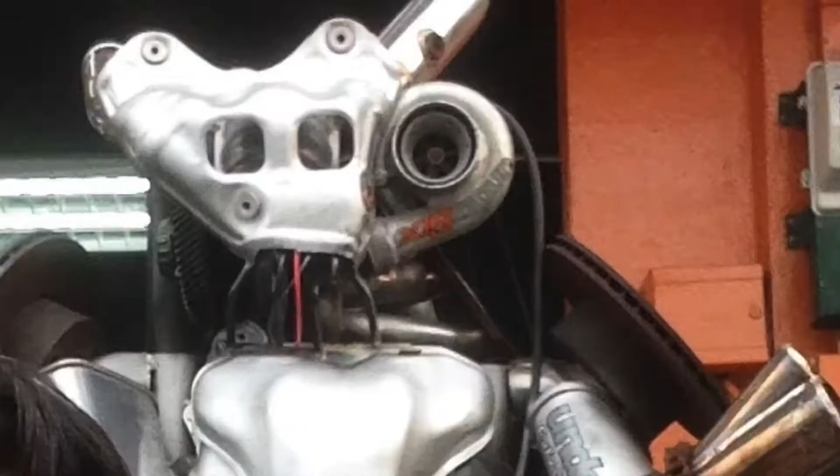I'm Yok Joe. In this video, I'm going to unbox the Lerdge X 3D printer controller board. This board is a closed source system pre-programmed by the manufacturer and suitable for individuals like me who know nothing about programming.

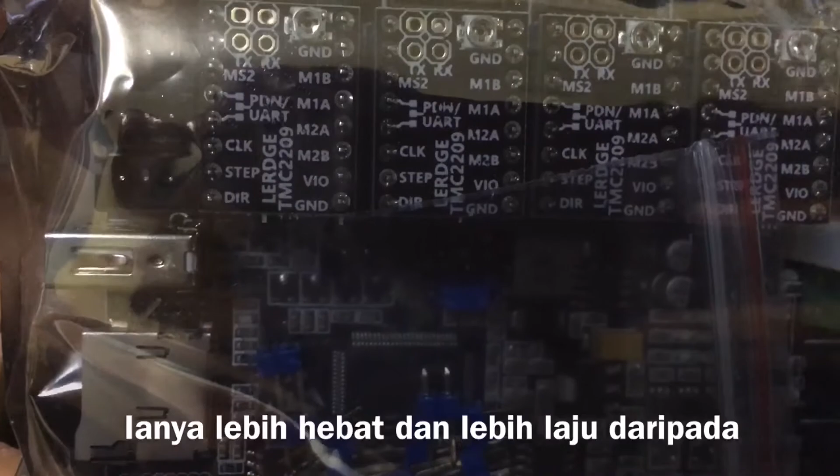This board is equipped with STM32, a 32-bit microprocessor. It is far more superior and faster than the previous Atmega 1284 controller board, which only has 8-bit microprocessor speed.

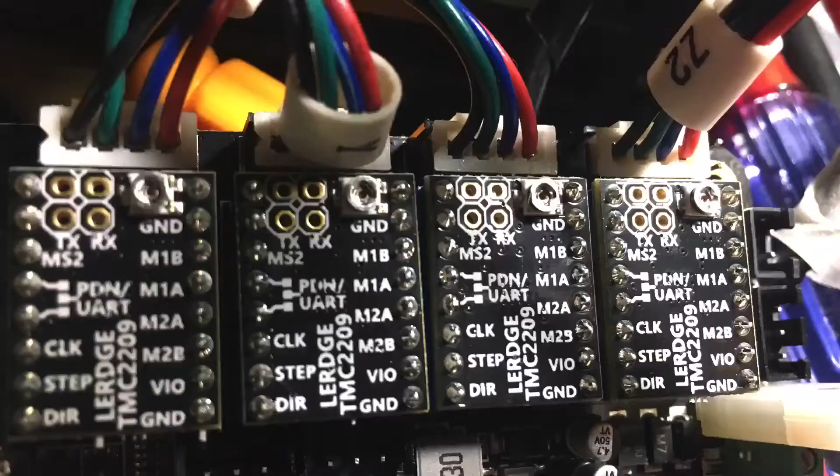This Lerdge X came bundled with a TMC2209 stepper motor driver for quiet printing. This board is for single extrusion.

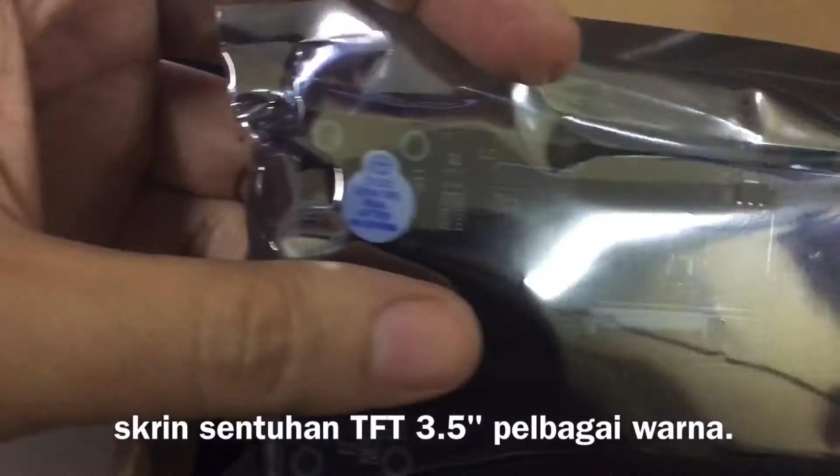This controller board came standard with a 3.5 inch TFT multicolor touchscreen. This screen also came with a manual control rotary knob.

Four pieces of anodized aluminum heatsink to be placed at the TMC2209 stepper motor driver.

This black and red wire is to be connected between the board and the 12-volt power supply.

This board came with a stylus pen for easy access to control the touchscreen.

This is the end of the part where I introduced the Lerdge X. Now, for the next part, I'm going to install this board to the Tronxy X5.

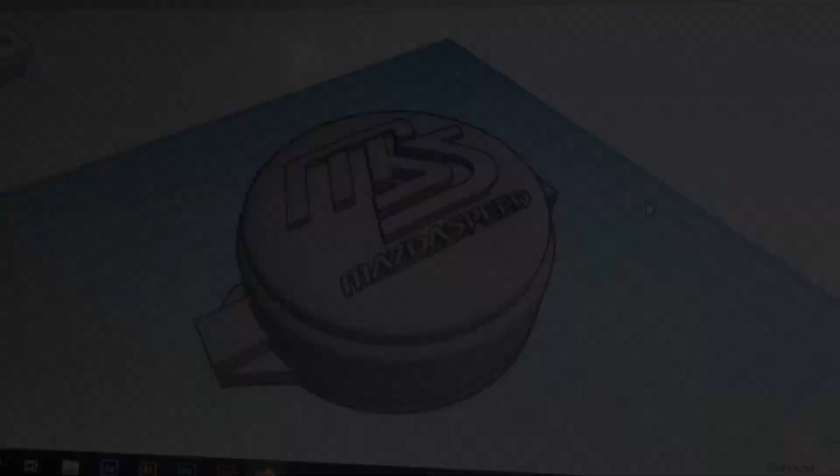3D printing is not as easy as a click of a button. I've made a few interesting designs, but this printer just won't print using the previous motherboard. I found out that the stepper motor driver had already fried. It is much better for me to purchase the very latest version of a 3D printer motherboard than to repair the very old version motherboard.

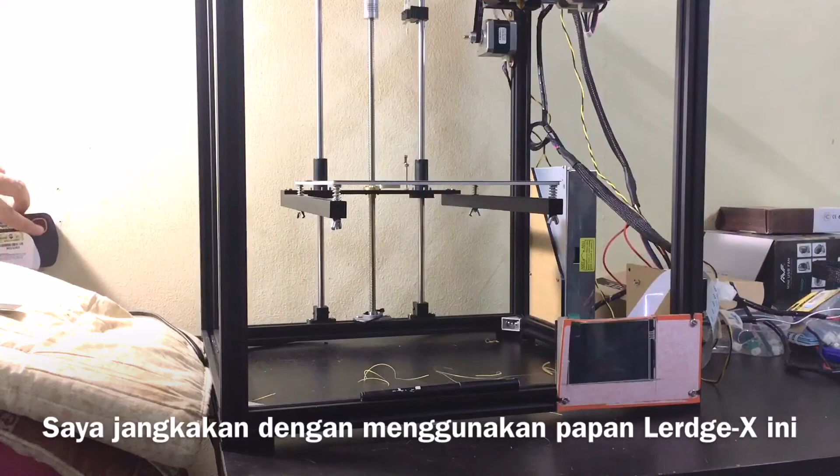I thought that by using this Lerdge-X motherboard, it would be a straightforward, hassle-free process. Sort of a plug and play thing.

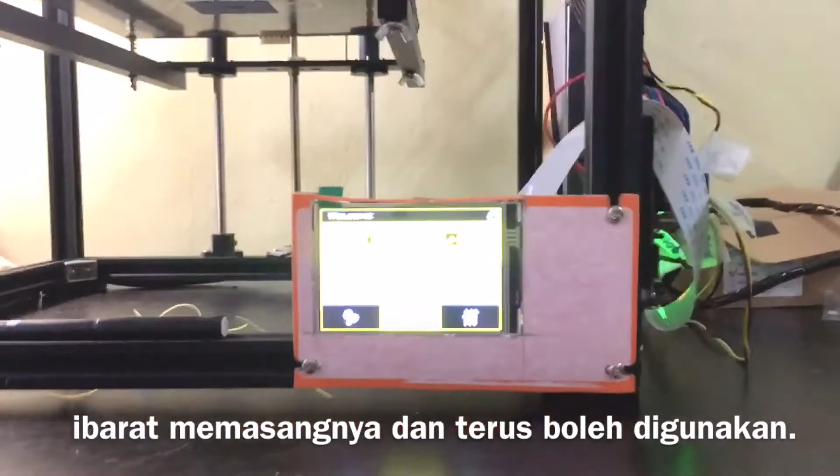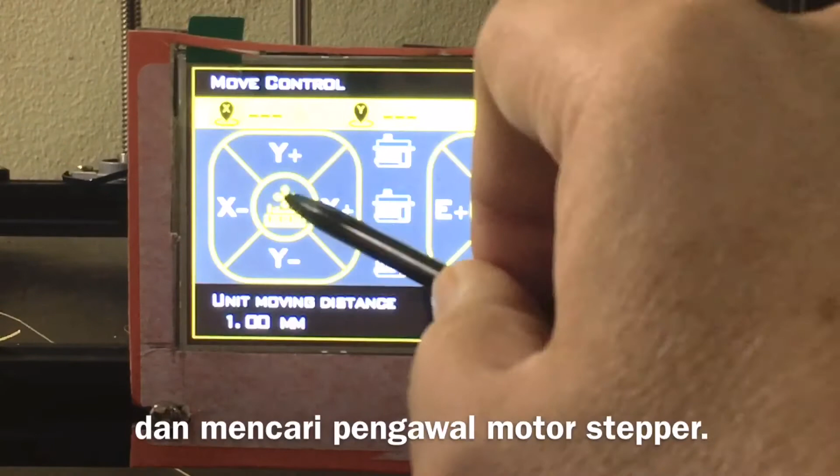I've made a temporary bracket for the screen from a piece of paper. I started by browsing the menu on the screen and searching for the stepper motor controller. The buttons for the stepper motor worked as described.

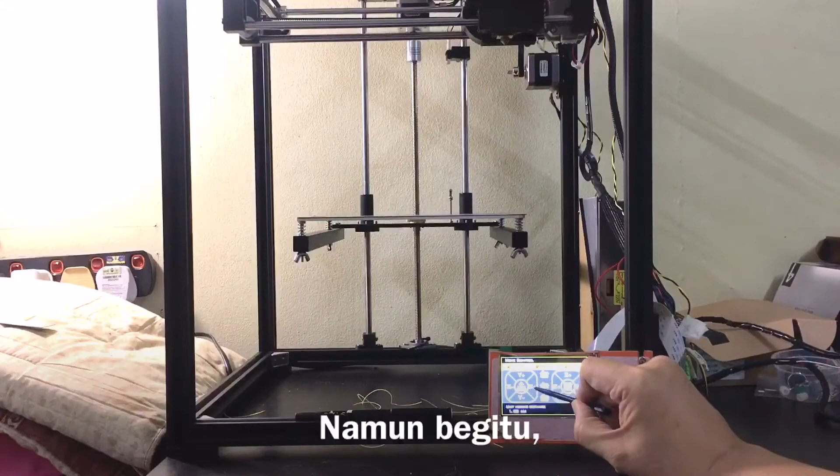However, when the Y-axis touched the end stop, the screen just went black. Then, when I released the Y-axis from the end stop, the screen came back online again. I tested the X-axis next, and the symptom was exactly the same as the Y-axis.

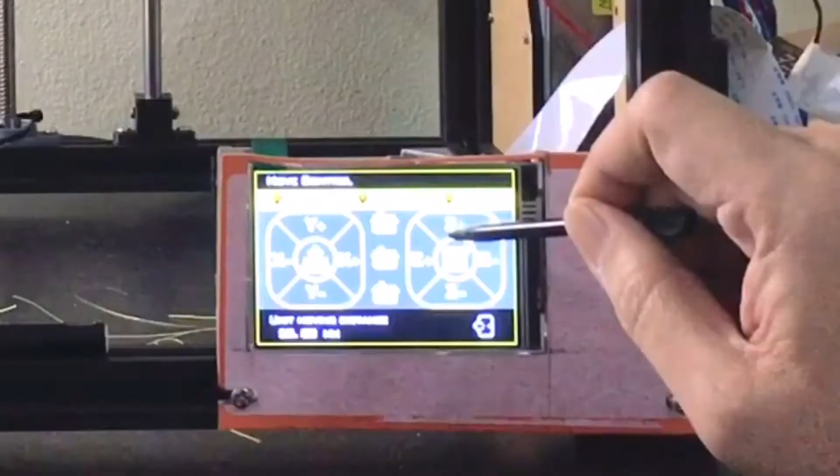Now I'm maneuvering the Z-axis which holds the heat bed. Comparatively, between the previous and this Lerdge-X motherboard, the stepper motor does not produce any sound. It's very silent - I only hear the sound of the cooling fan.

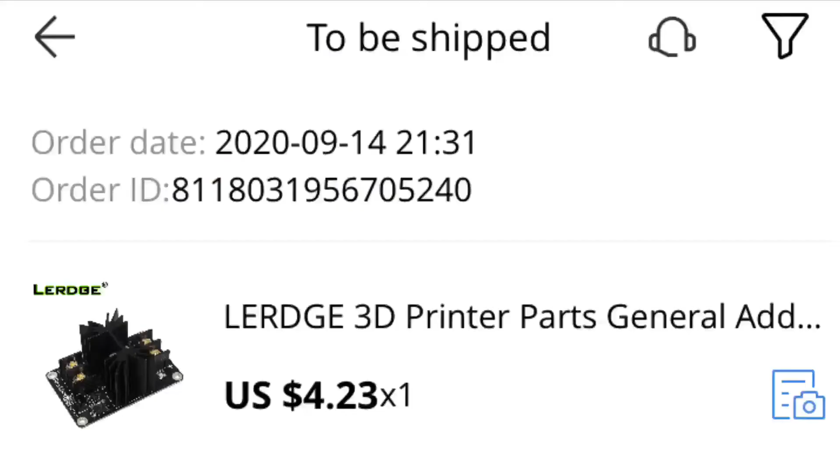In order for the printer to function, I have no choice but to order these 3 items directly from the Lerdge store. The first item to be added is the power MOSFET to power up the heat bed.

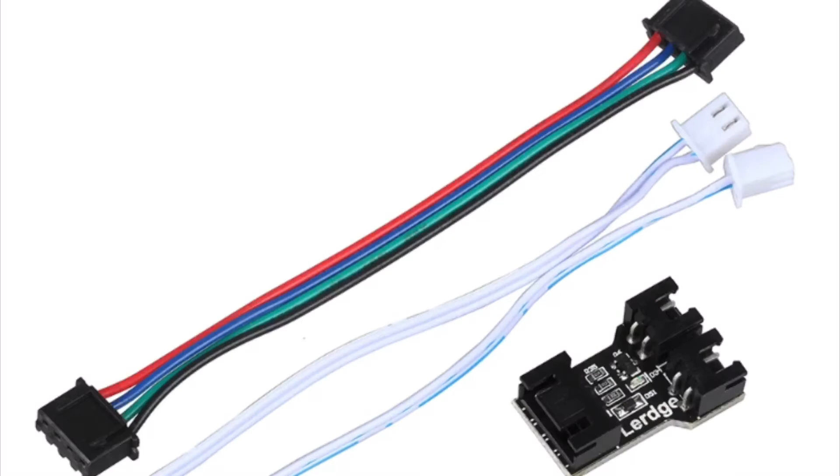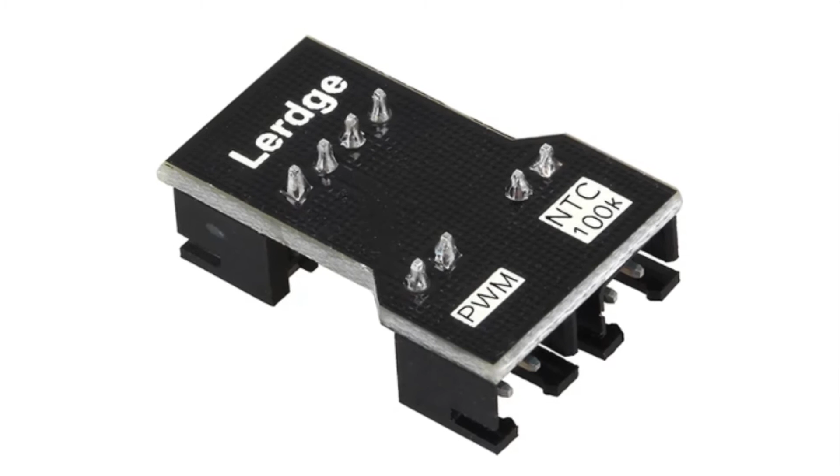The second item is the adapter that links the motherboard, the thermistor and the power MOSFET. This is how the two devices work together. With this setup, it will precisely control the amount of power needed for the heat bed.

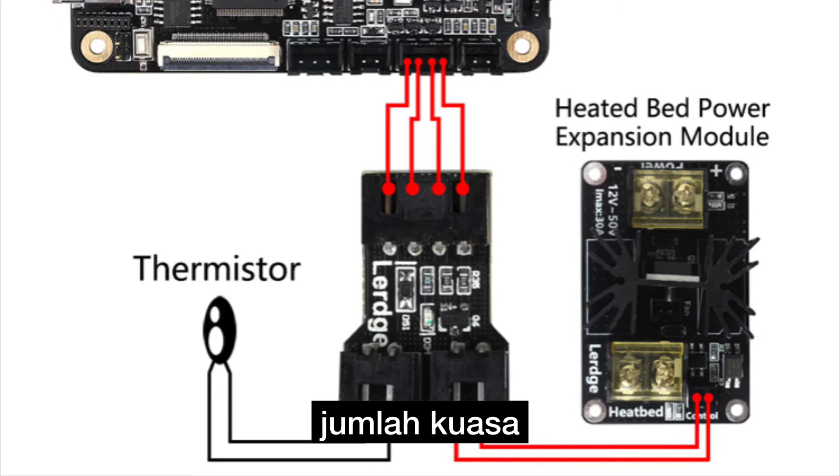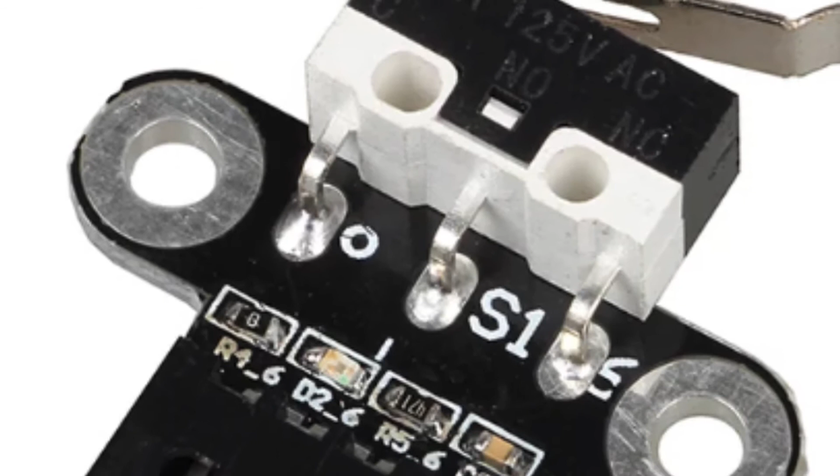The third item is the 3-pin mechanical end stop. It will automatically stop and limit the movement of the X, Y and Z axis each time they touch.